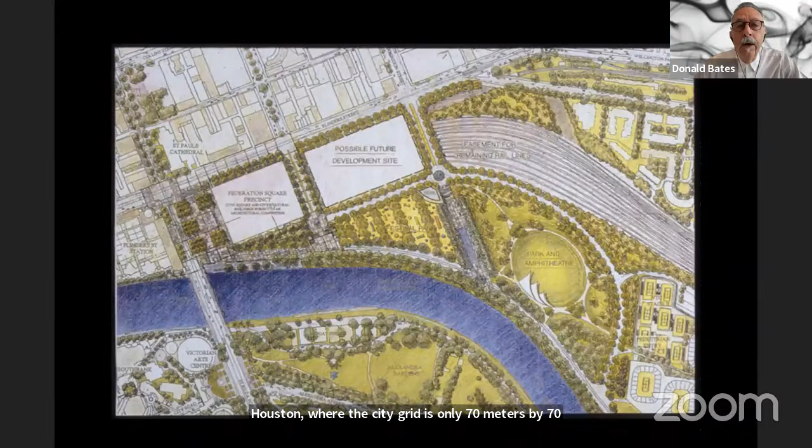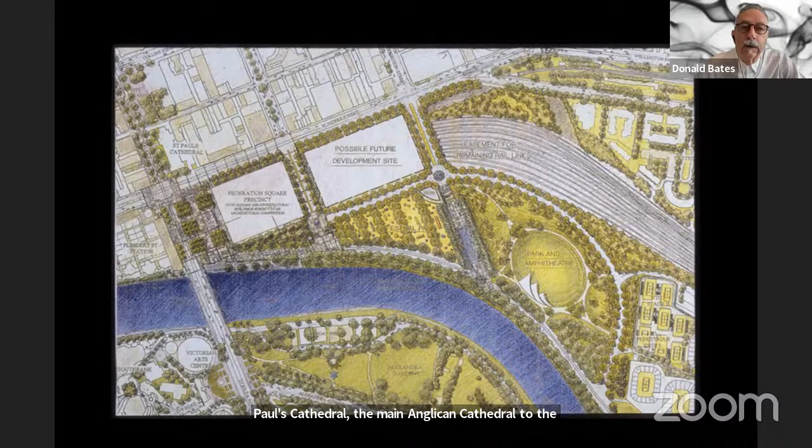These are some of the documents from the competition. On the left-hand side is the area they called the Federation Square Precinct. It also shows a public plaza to the front, facing across to the main railway station, with St. Paul's Cathedral, the main Anglican cathedral, to the north. The sense was of continuing the Cartesian grid of the CBD down until it reaches the riverside.

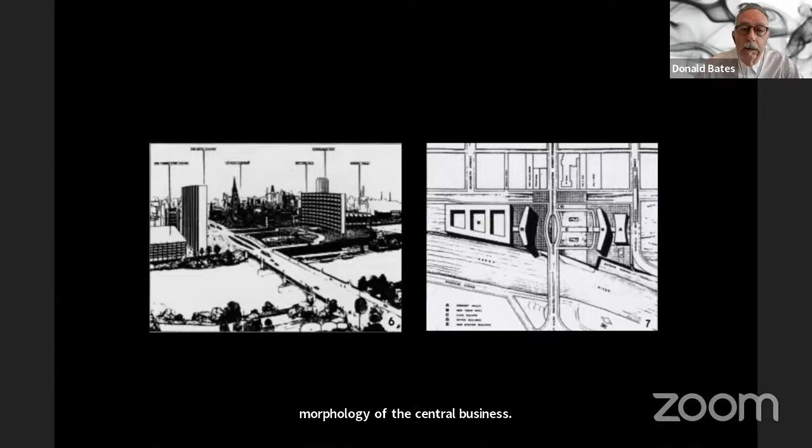This photograph from that period shows the site just north of the river, and the gridded morphology of the central business district. There had been other projects proposed for what is now Federation Square, but they never came to fruition. The competition was really to build over the railways.

It was called Federation Square because it was to celebrate 100 years since the founding of the Federation of Australia in 1901, so the idea was for the project to be completed by 2001—though it actually took a year longer. The point of showing this image is the yellow framing of the CBD and the order of the grid. But our site is outside the grid.

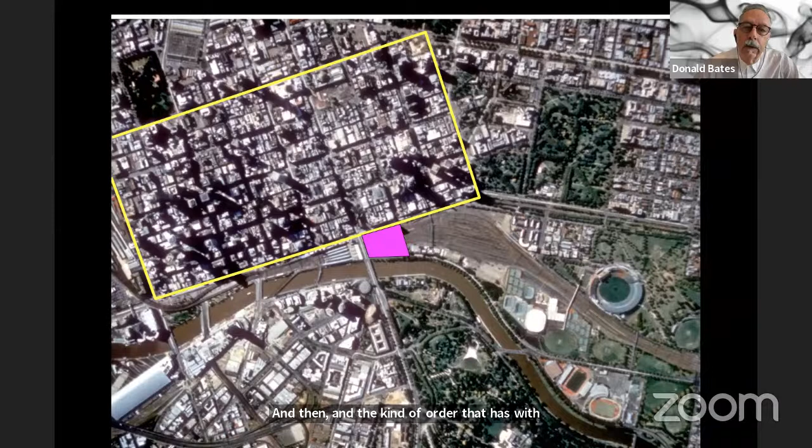It was important to realize that, because it meant we didn't have to follow that Cartesian order. Not only is the site outside the grid, but it's also related to the railways running through, which have their own logic and formal arrangement, as well as the river—being an alluvial river, it had historically shifted and changed. For us, this was a zone of flux, different from the CBD.

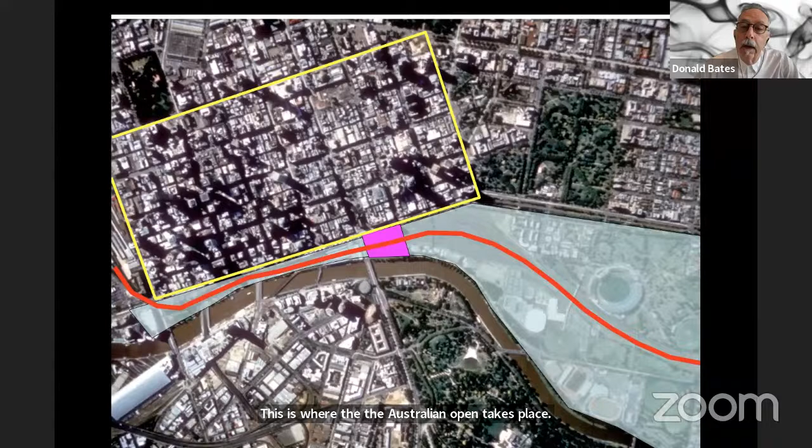Also, on the right-hand side, there's a whole series of sports facilities—this is where the Australian Open takes place, and there's a large football stadium for Australian rules football and cricket that holds 100,000 people. But it seemed to us that we could operate in a very different way than that.

But my digital tool and the tools that we used were things like Illustrator. They weren't drawing programs or architectural drawing programs.

And then with some of the functions, some of the filters in Illustrator, we started to change it. So this is a kind of outcome of taking that tartan grid and manipulating it and distorting it, so to speak. And then out of that, a series of hand drawings, taking from those distortions, those twists, those shifts, to try to come up with a sense of order that was different from the CBD grid.

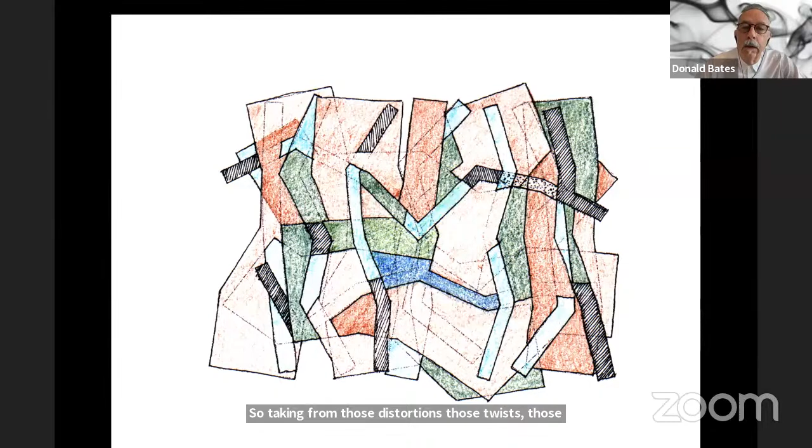We did other kinds of drawings, like here with folded tracing paper. We were just trying to understand what happens when these filaments, these lines, these sort of bands of paper overlap, and you get increased senses of densities, and that those densities produce a kind of visual differentiation of how a space might be organized. These are just lots of images of drawings that we worked on, working back and forth to see these filaments and how they might exist.

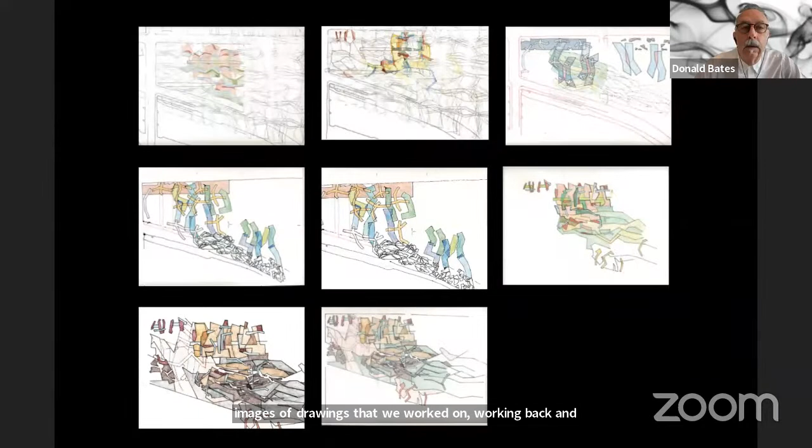These are from the office again, both Peter and myself drawing these, but also everybody else in the office was working through these projects like this.

We were interested in the way in which in architecture, the line is really the thing that makes difference, that when you draw a line, you're notating differences. You're notating the difference between stone and glass, the difference between inside and outside, the difference between this is mine and that's yours, the difference between one kind of experience and another.

And so we were also trying to do drawings that weren't just about lines where there was an overlap or a fading or a transition between one tone or one tonality and another, or color and so on and so forth. So these are the kind of works that we were trying to look at and the kind of spatialization of what that might mean.

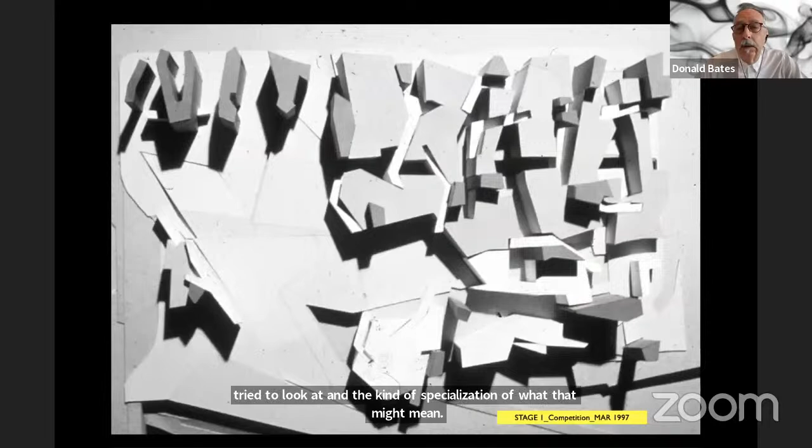It was a two-stage competition. This was a model from the first stage. We were fortunate to get shortlisted with 4 other practices. And then from that, we developed it further.

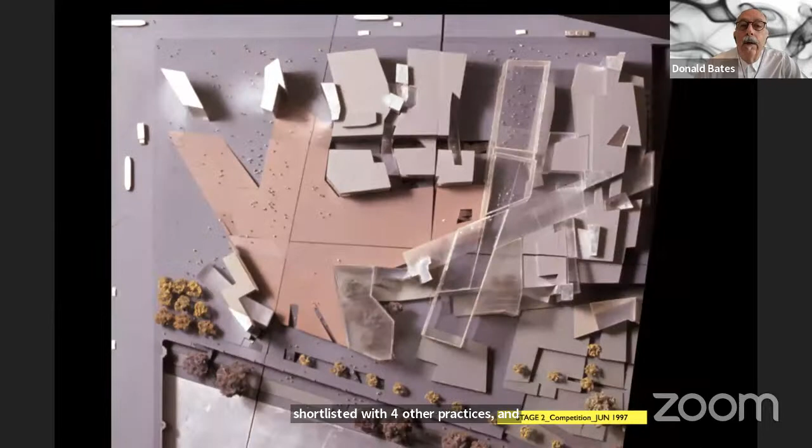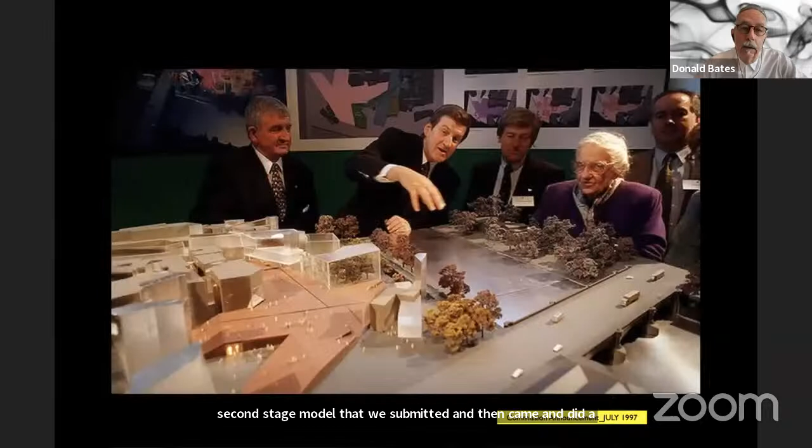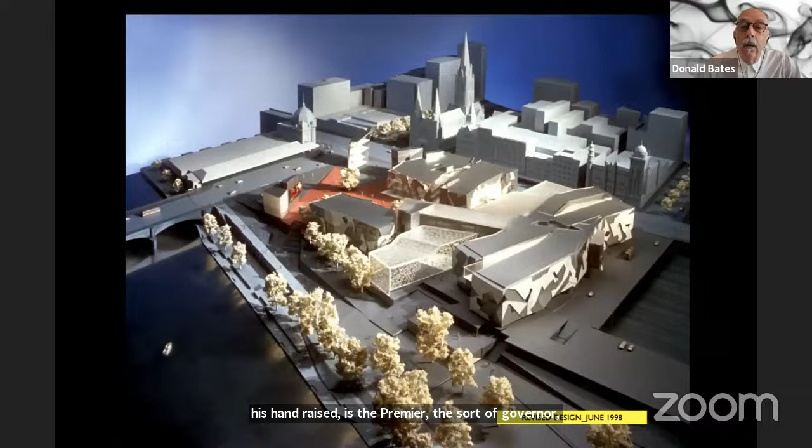This ended up being our second stage model that we submitted and then came and did a presentation to the jury. And then over time, and this was after the announcement, the man in the middle with his hand raised was the premier, the sort of governor, you might say, of the state of Victoria. And then this was the model after we had won, and some other additions had been noticed.

So between the competition and the actual project, a big section, which is the building closest to the right-hand side, which is the National Gallery of Victoria, Australian Art, was added and it hadn't been part of the competition. I'm just showing this as a kind of background to the project as a whole, because what I really want to talk about are the facades and the atrium structure.

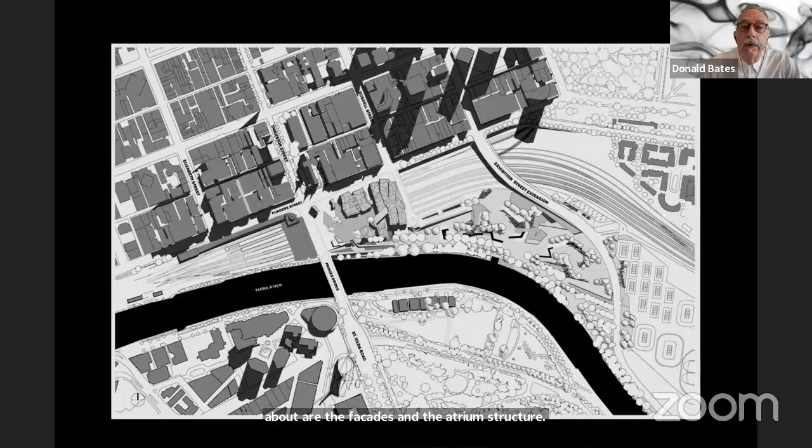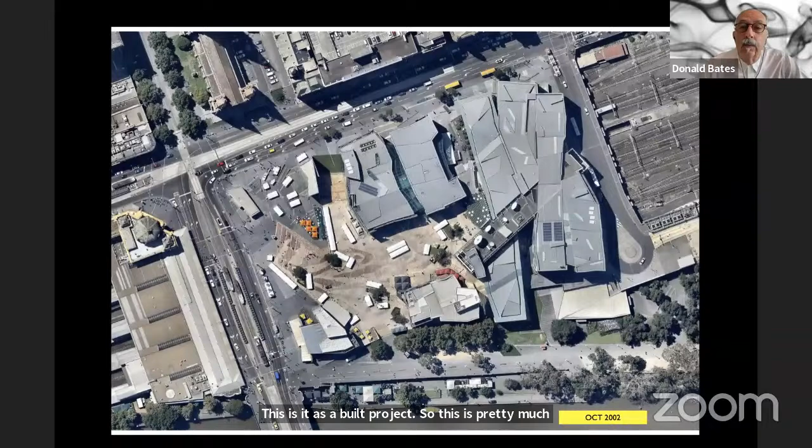But this is it as a kind of completed project in the context of the city. This is it as a built project. So this is pretty much what it was in 2002 when the project was finished. You can see it within the context of the city, and within the riverside and the train station to the east, to the west of the project.

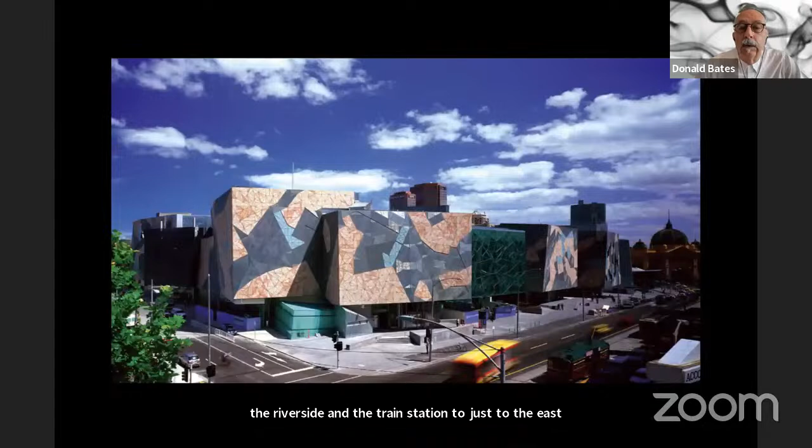The plaza is a kind of double ground. That is to say, it starts at ground level, but by the time you're at the far end of the plaza, you're actually one level above the street. And there's an entry point from Flinders Street, which is the street to the north, that comes in. So it's a kind of double ground.

I wanted to really focus on this theme of coherence and difference, partly because it's a response to the project - the project is a precinct as a whole, Federation Square. So it's not just the public square, it's a precinct with cultural buildings, an art gallery, multimedia and screen-based exhibition space, and a museum. It has a performance venue, offices for radio and television, and other venues and spaces for food and beverage and commercial facilities like bookshops and so on.

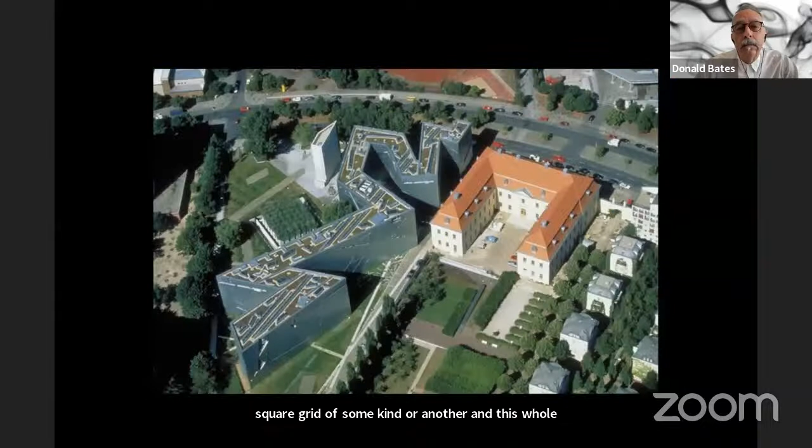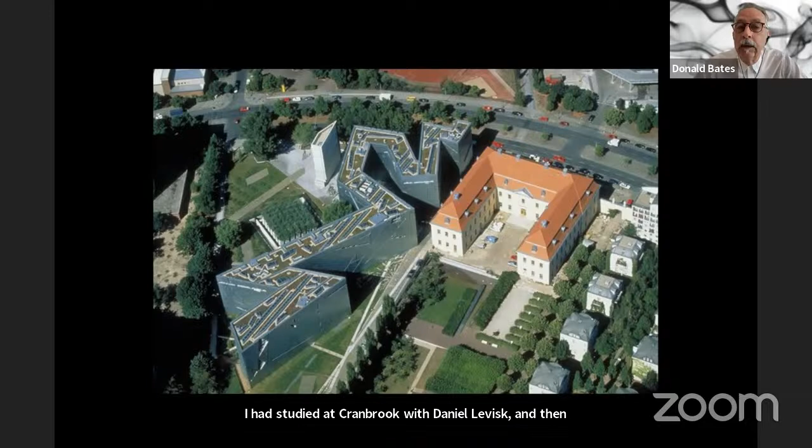I had studied at Cranbrook with Daniel Libeskind, then worked with him as an associate when he was doing the competition for what was then the Berlin Museum, now called the Jewish Museum in Berlin. One aspect that stayed with me was this sense of: what is a facade? What does a facade do? What kind of articulation can it have? Does it need that ordered grid which seems about utility, ease of construction, regularity and repetition, versus the kind of unique articulation of a surface like you see in the Jewish Museum in Berlin?

And then the consequence of that - what does it mean for an interior when you don't have an ordered gridded structure on the outside or on the facade, and what does that mean for the interior?

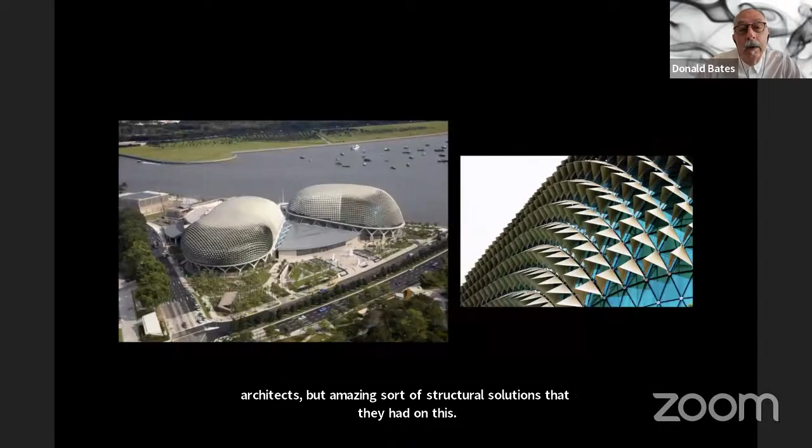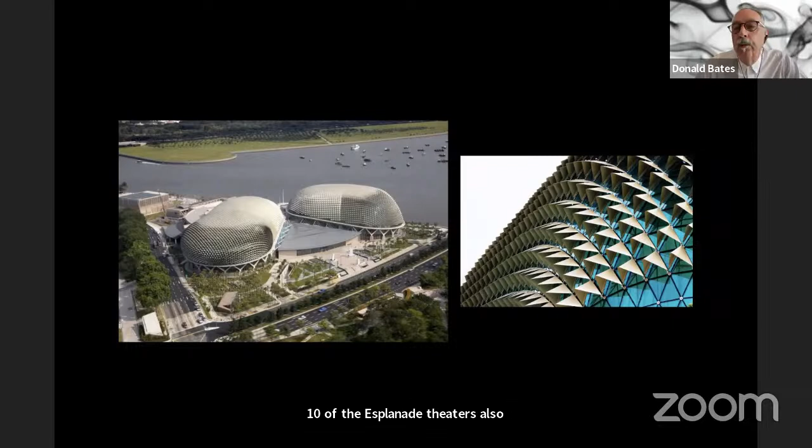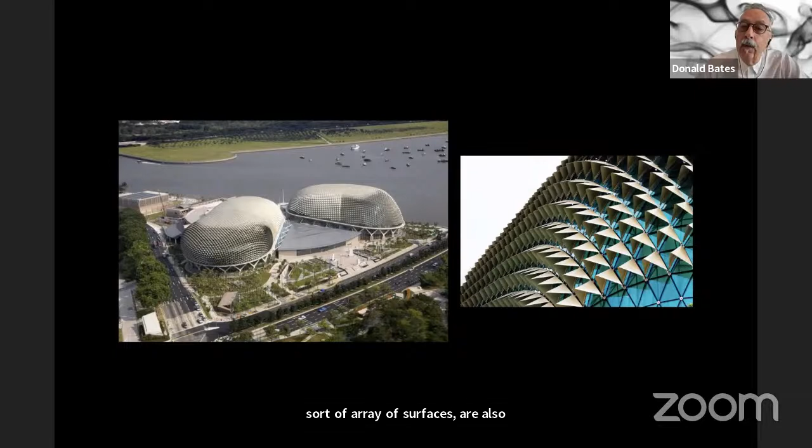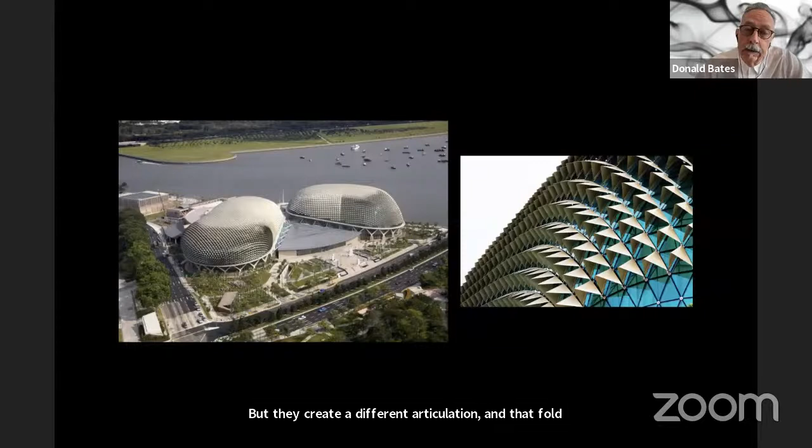They also did this project again with Atelier 10, the Esplanade Theaters, also in Singapore. You can see a detail on the right-hand side. This structure has a very unique array of surfaces that are also shading devices. They're quite simply a folded plate, but they create different articulation, and that fold can be compressed for a different angularity as a sun shading device, giving you this patterning that comes of it.

So these are the guys we were working with from day one. As we were developing the project, we would take a drawing like this, walk across the street and say, okay, we're thinking about this for a facade—what do you think? And they'd say, well, what is it? What is the black, an opening, or is the black solid? Is the white some kind of pattern? What is the grid and stuff?

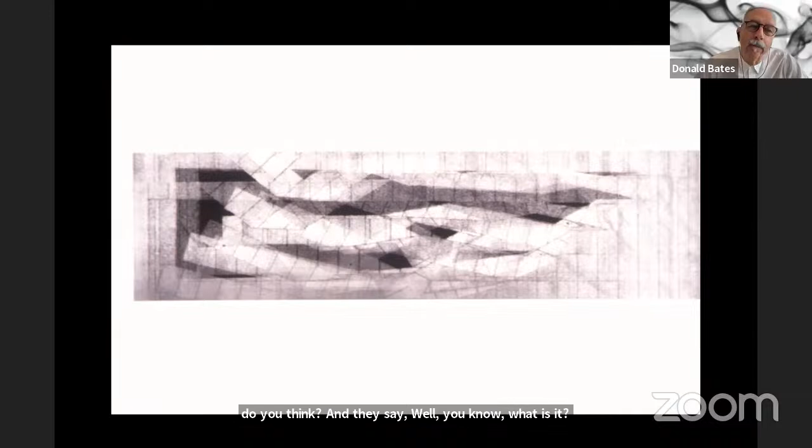So we were interested in the architectural possibility of transitioning from one material to another, one figuration to another, one way in which a surface can be articulated where that transition is almost indecipherable.

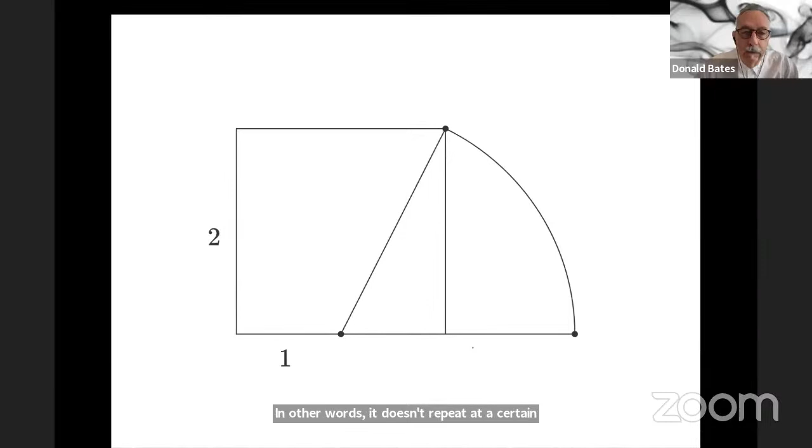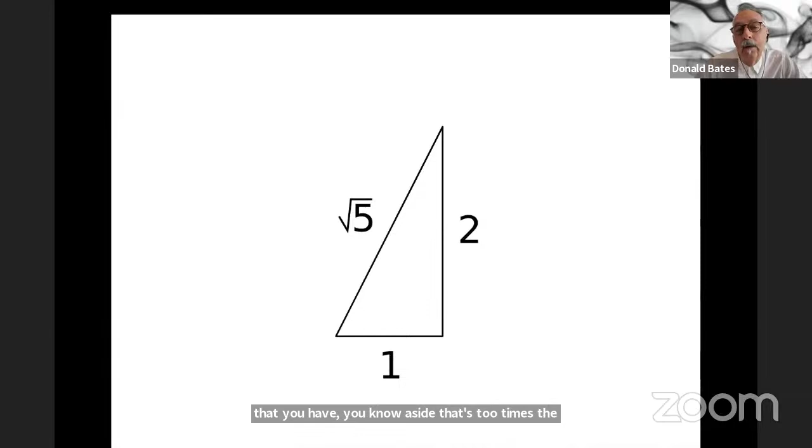In other words, it doesn't repeat at a certain point. It comes out of a simple figure of the golden ratio, so that one side is 2 times the length of another, and the third side is root 5. Within this, you start with a triangle and you can subdivide it, and then again—one triangle plus 4 other triangles keeps generating a similar congruent set of triangles that are endlessly morphing and moving through. This is why we called it a fractal facade.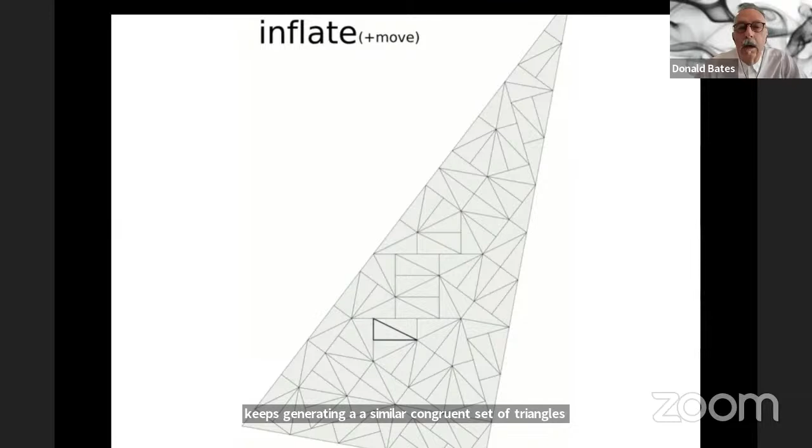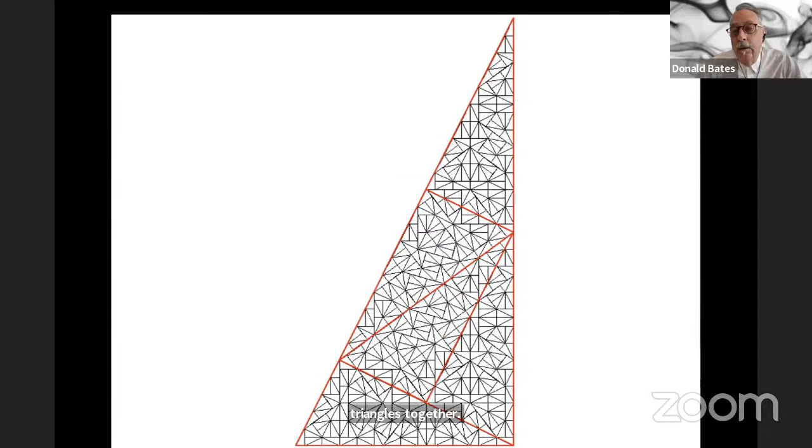So you start with a single triangle, put 4 other triangles together, and you get a self-similar triangle, and so forth. You can either make it additive or do it by subdivision. We start with a surface that has this sort of patination. But what it also meant, from a fabrication point of view, was that it allowed us, in the same surface, to articulate different figurations, because it's just a way of selecting how many of these triangles form a group. Within that same surface, that same pattern, you can have lots of different groupings and therefore different figurations.

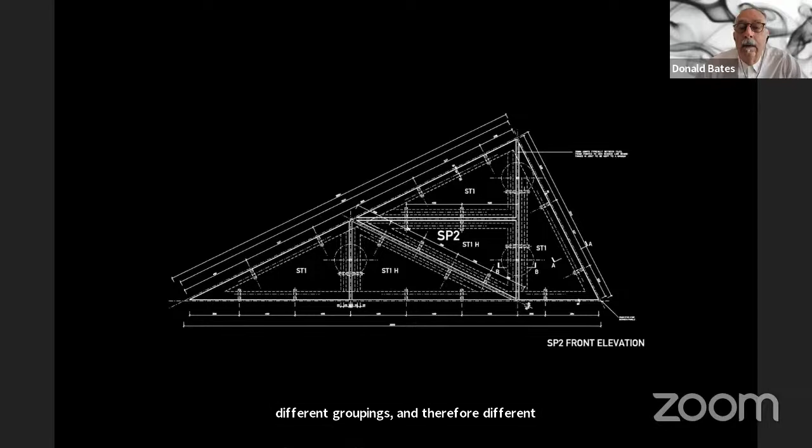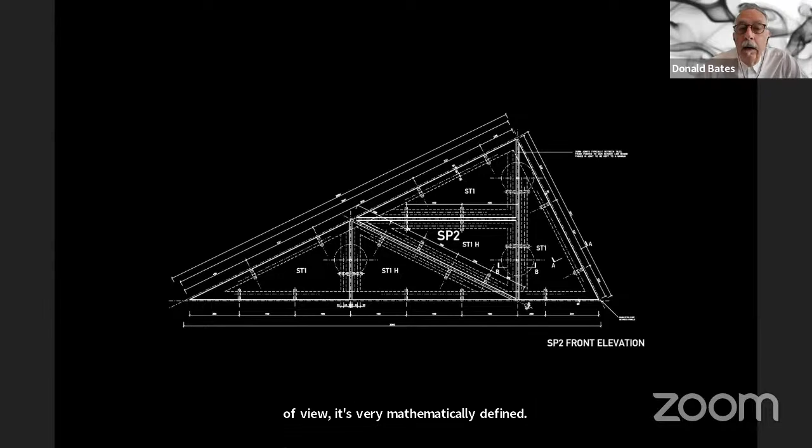So from a structural point of view or a fabrication point of view, it's very mathematically defined. Taking one triangle and adding it with 4 other triangles of the same material, they're all put together on an aluminum frame, so they're all attached.

You can see in this working drawing, this is actually showing one with a piece of stone where you can see the attachments to an underlying aluminum frame.

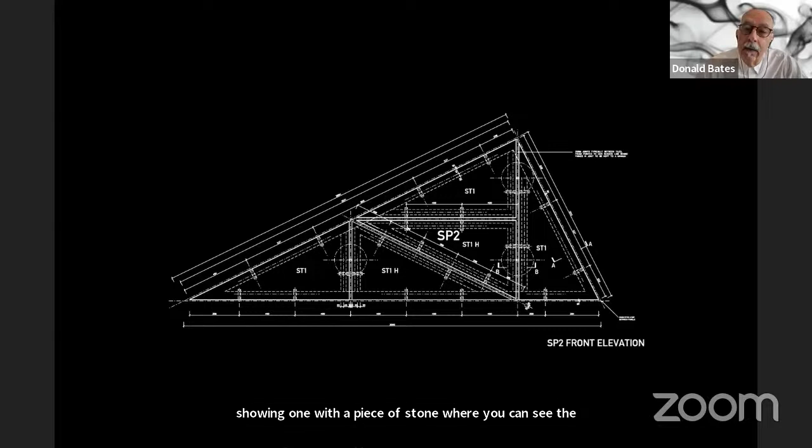When we have a single panel, a single triangle that you would see, we call that a tile. And when you put 5 tiles together, you get a panel. And you would put 5 panels together, you get a mega panel. And these 5 panels, which have an aluminum frame, are attached then to a steel frame.

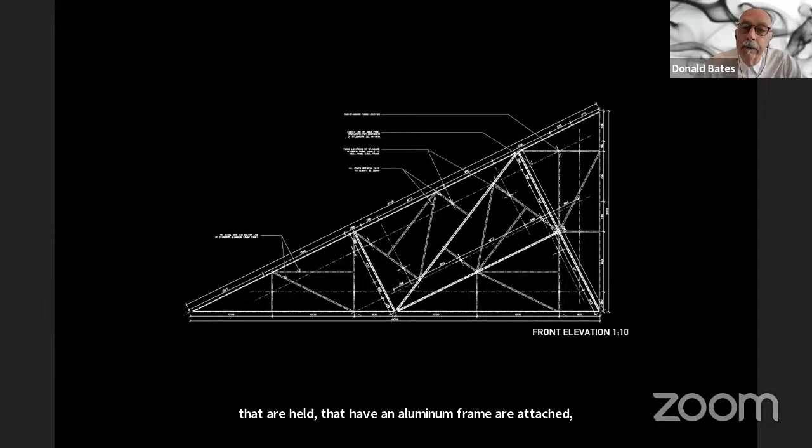And all of this is done in the factory, so all of this is prefabricated in the factory. So even though we're trying to create a facade with a great degree of variation and differences, we can still allow it to be prefabricated because of its geometric order.

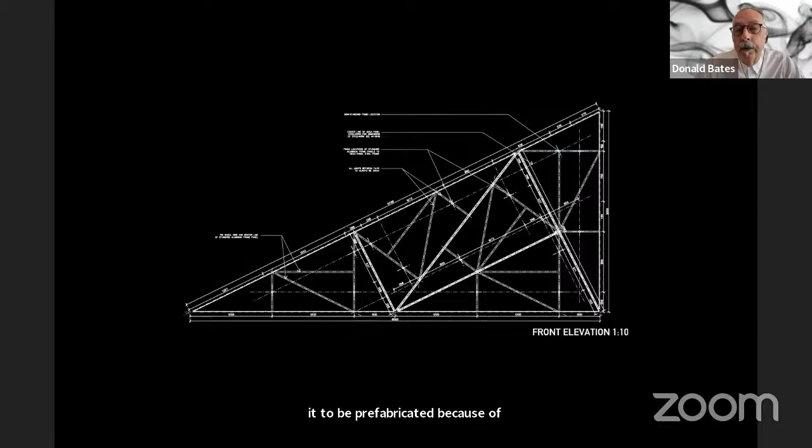So these are some of the steel frames that the panels would go onto, the steel frames for the mega panels. And this is one of those mega panels.

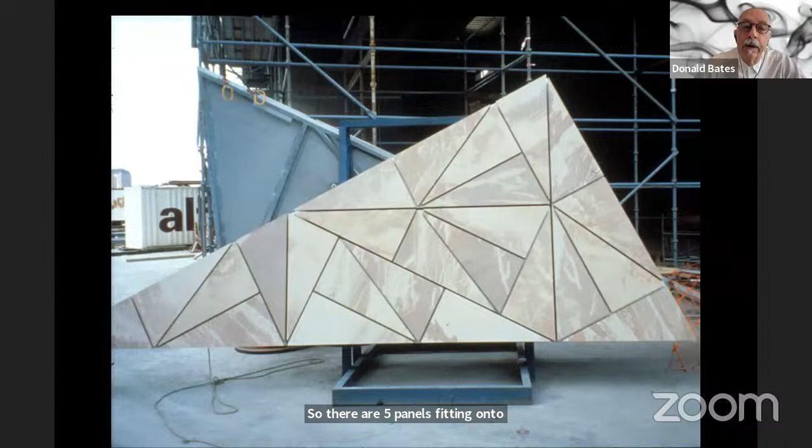So this is the panel that's been brought from the factory and is waiting to be put up on the facade. It just so happens on this panel, all of the tiles, that is to say all of the singular triangles, are made out of sandstone. There are 5 panels fitting onto this mega panel, and each panel is made up of 5 triangles, and they just happen to be sandstone in this instance.

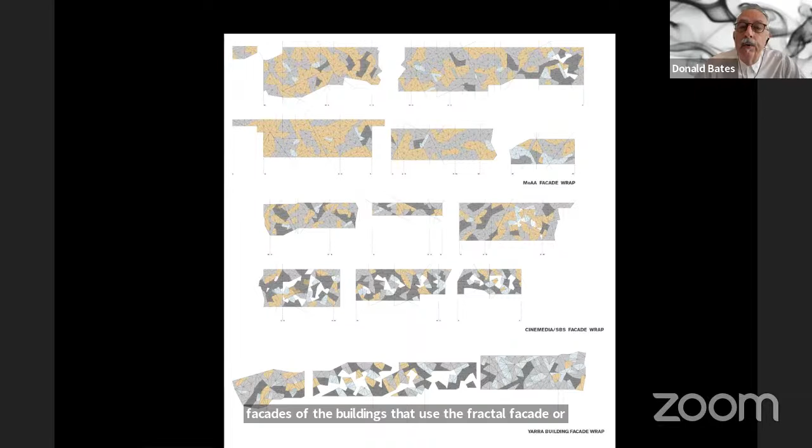This drawing shows all of the facades of the buildings that use the fractal facade, or the pinwheel grid. You can see there's also a differentiation. The top 2 bands are the panels and facades for the museum, for the National Gallery of Victoria, Australia, and they were basically composed by Peter, my colleague.

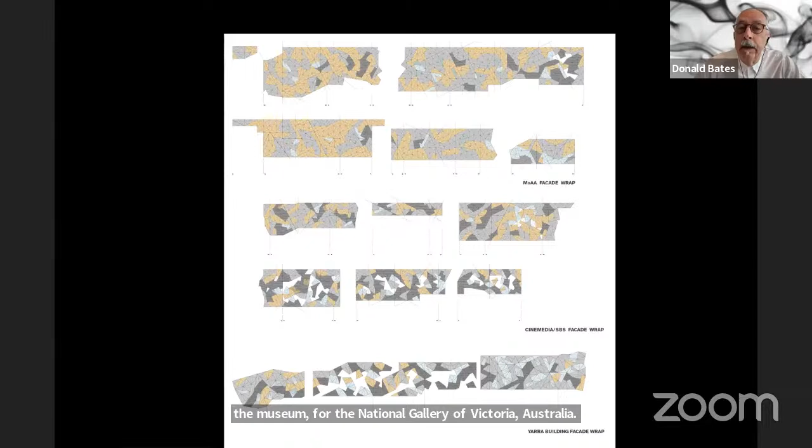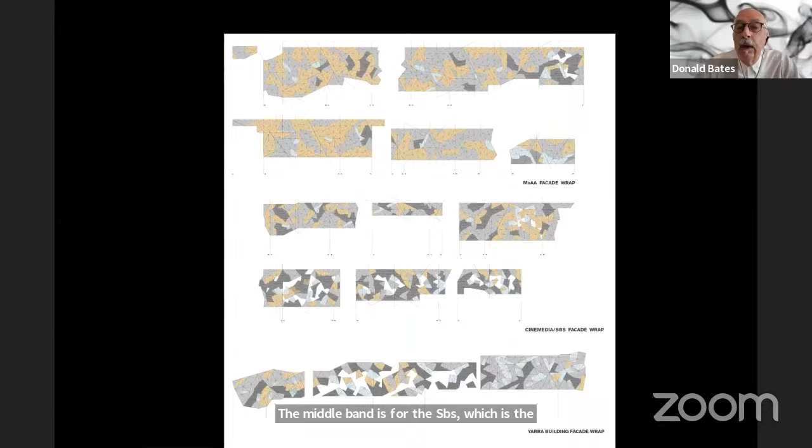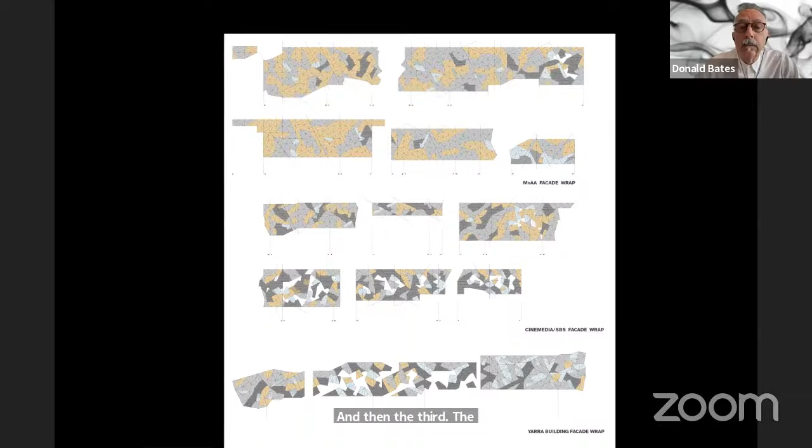The middle band is for the SBS, the broadcasting service, and what's now called the ACMI, the Australian Centre for the Moving Image. I was in charge of those, so that patination is ours. And then the third, the last row at the very bottom, which is on what's called the Yarra building, was done between Peter and myself and a group of others in the office.

This is the building. You can see it's still under construction in this photograph, but you can see it in some kind of comparison to the buildings in the background of the CBD.

And so all of that surface and that surface differentiation. We have zinc, we have perforated zinc, we have the sandstone, and there are some glass, which are also in the triangular grid pattern.

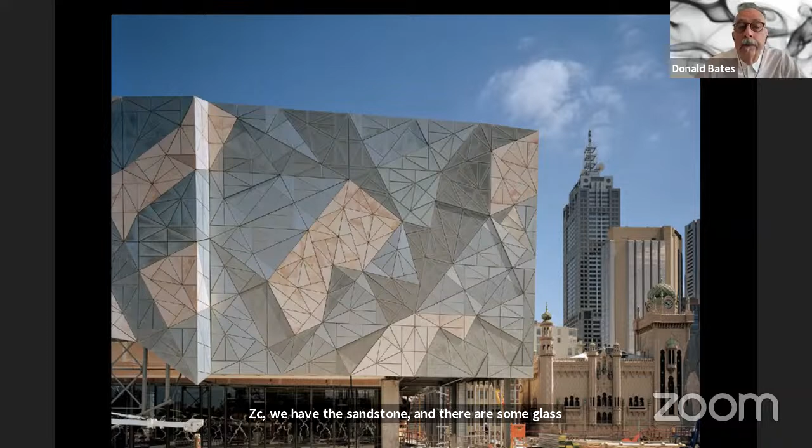This shows it coming together, and particularly on the building for SBS, the Special Broadcasting Service, because it's actually an office building, people are in there working, they need to be able to see out. So the facade here in perforated zinc, this is from inside the offices looking through the facade.

On this image, we're actually facing to the north, which is where the sun is in the Southern Hemisphere. And so it's really acting as a shading device from the sun.

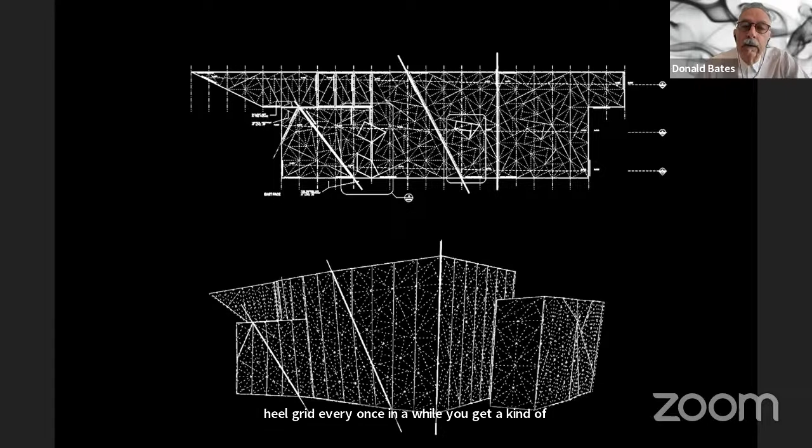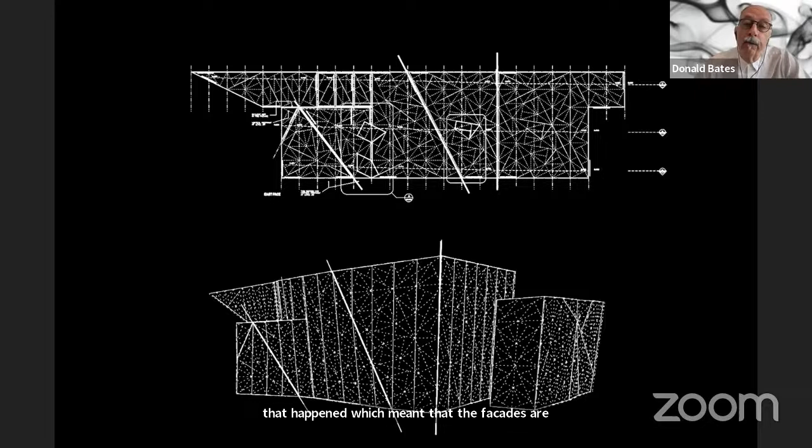The other thing that happens is that within that geometry of the pinwheel grid, every once in a while you get a kind of alignment of the geometries. And where those triangles align, you get a kind of folding point, a fold that happened, which meant that the facades are not extrusions from the ground up or from one plane upwards. They actually bend and fold and articulate.

So you can see here, this is on the National Gallery of Victoria. There's a fold that takes place in the facade because there's a staircase behind that runs from the upper level of the galleries down to the ground.

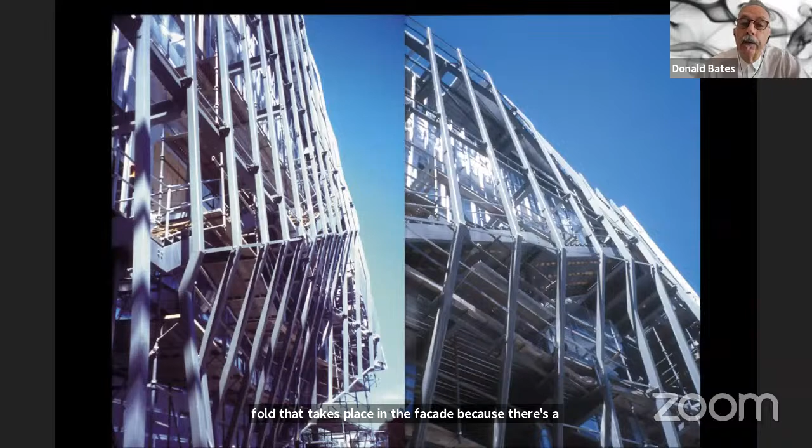And so once we've covered that staircase, then the facade can fold back in, so that you get this as a result of where that's articulated.

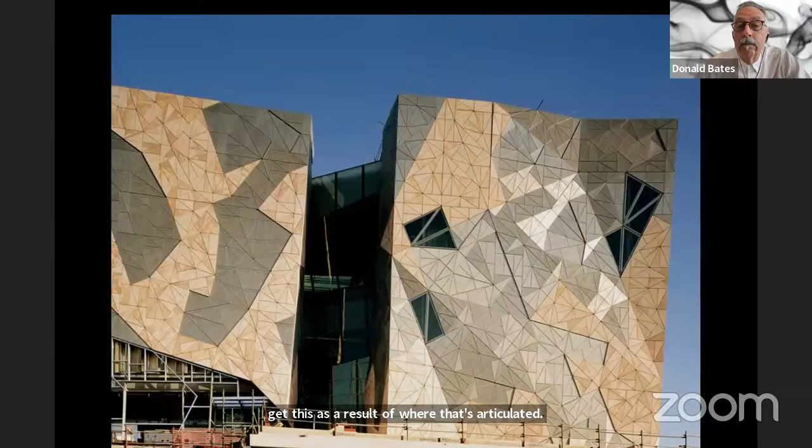This is on the backside, again, of the National Gallery of Victoria, and you can see with the shadows and such, you can see how that surface is not flat, it's articulating in and out.

And again, there's also even the slight difference between the thickness of the stone. The stone is about 2.5 inches thick, let's say. And then sometimes the zinc, which is just a millimeter or so thick on a frame, is flush to the top surface, and sometimes it's flush to the lower surface of the sandstone. So you also get a secondary patination of shadow lines between the difference of 2.5 to 3 inches.

And as I said, sometimes we have offices. So within the same system, with perforations and even leaving panels off of the building, we have the possibility of views to the outside.

These other images I showed just before are for the National Gallery. These are galleries for art, so we don't have natural daylight going into those spaces. The same thing happens for the cinema, but then we also have offices. So the same system again allows for a sense of coherence while also allowing for difference.

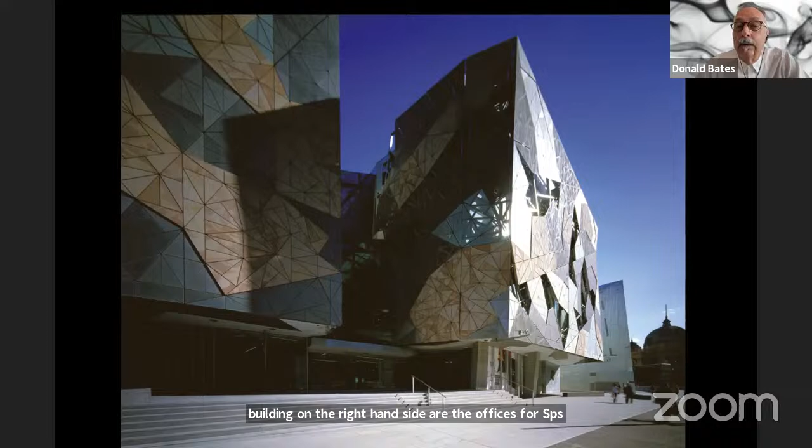You can see in this one on the left-hand side, this is the building that has the cinemas, and the building on the right-hand side are the offices for SBS, the broadcasting service. This is the facade we were looking through, facing towards the north.

This is the National Gallery facade, and you can see it above the railways there, and how it changes from the left-hand side to the right-hand side. On the left we have a lot more zinc and less sandstone, and on the right we have more sandstone and a little bit less zinc.

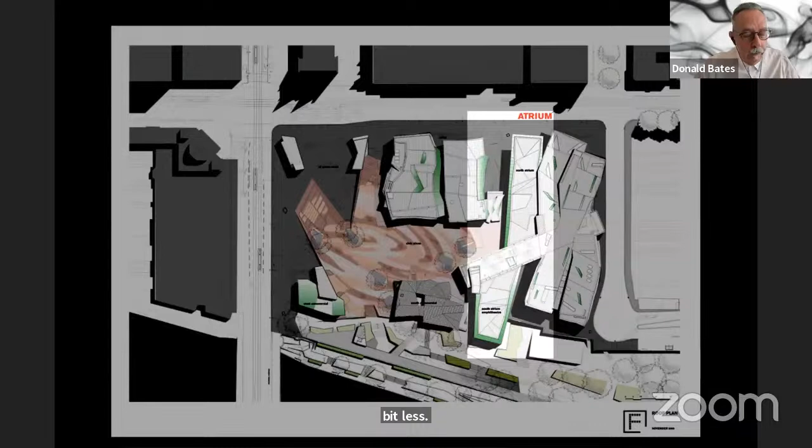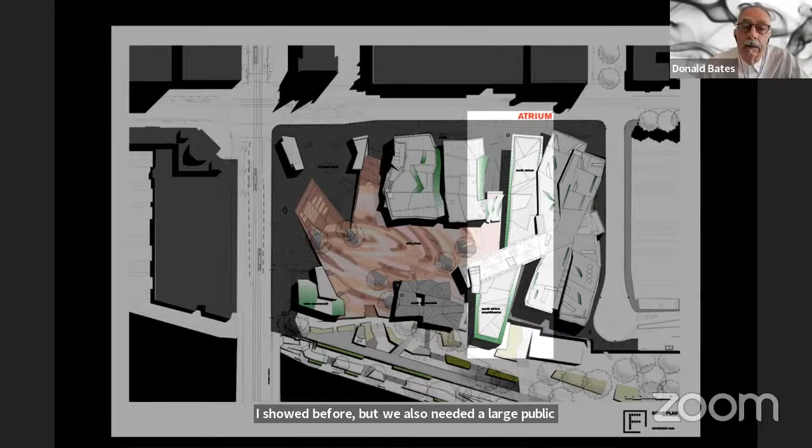Coming out of that facade is also a major structure called the atrium, which is a large open space. The plaza is where lots of public events happen, as I showed before, but we also needed a large public space that could be covered, because in wintertime in Melbourne it's quite rainy and cold, though it doesn't snow. There are lots of public events that happen in Melbourne, so the atrium was that space that would allow for public gatherings, but with some protection.

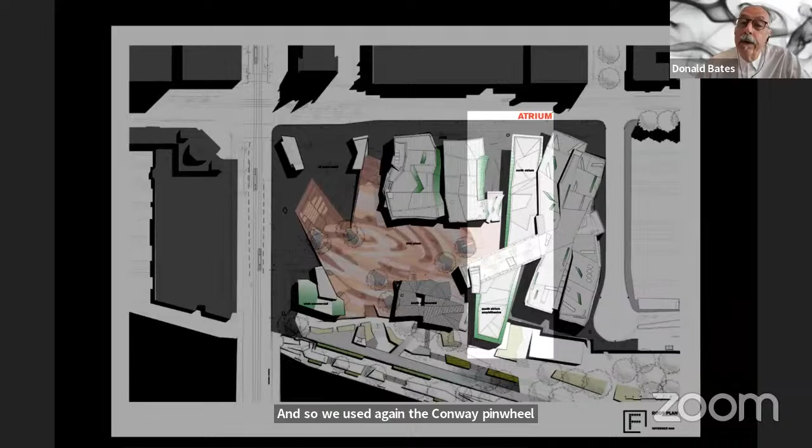So we used, again, the Conway pinwheel grid, but now as a three-dimensional structure. And we ended up with this kind of thing. This is the entrance, again, from the north.

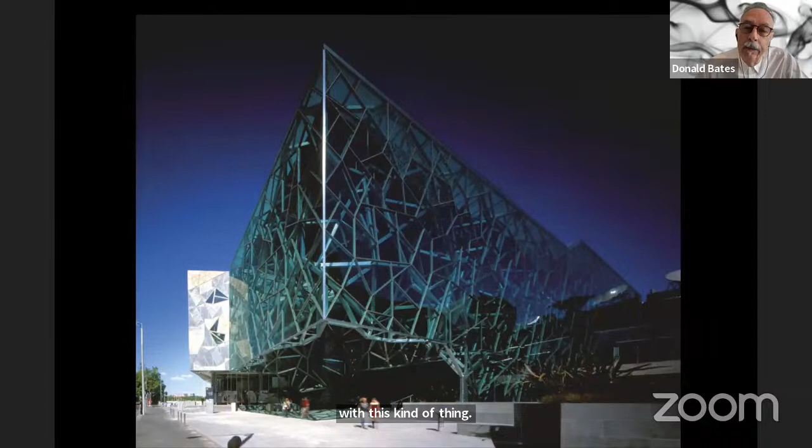The other important thing was that there was no front door — that is to say, it couldn't be closed. So this public space, which is a connection from the city, from the CBD to the north, all the way down to the river, is open 24 hours a day, every day of the year. There is no way to close it off, and that produced some issues in terms of ventilation and such.

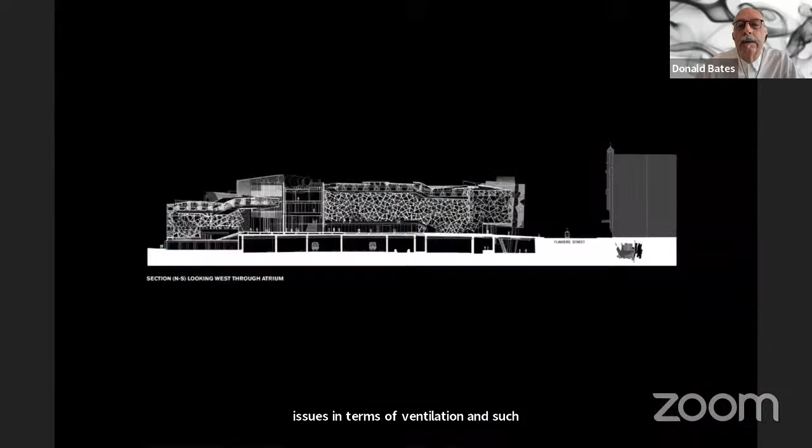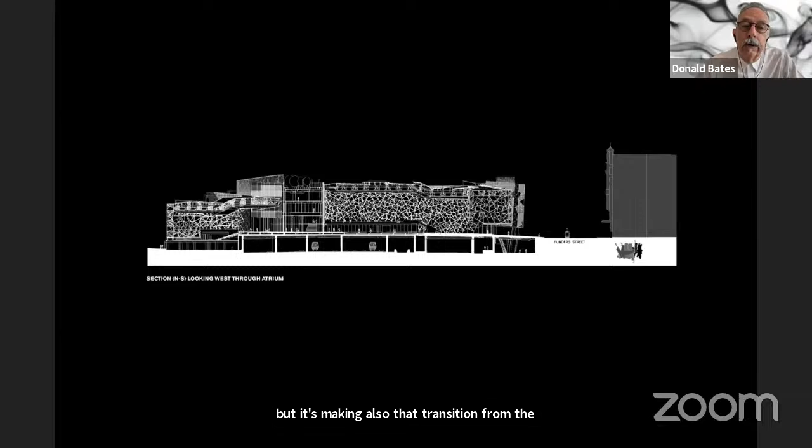But really, just to talk about the structure itself: you can see on the right-hand side is the CBD, the downtown of Melbourne, and on the left-hand side, just a little bit beyond the drawing, would be the river. So it's over the railways, but it's also making that transition from the city to the river or vice versa, and it starts to step down once we're no longer above the railways.

This structure is about 110 meters long, so that's about 350 feet. And it's about 18 meters across and 17 meters high in terms of internal volume.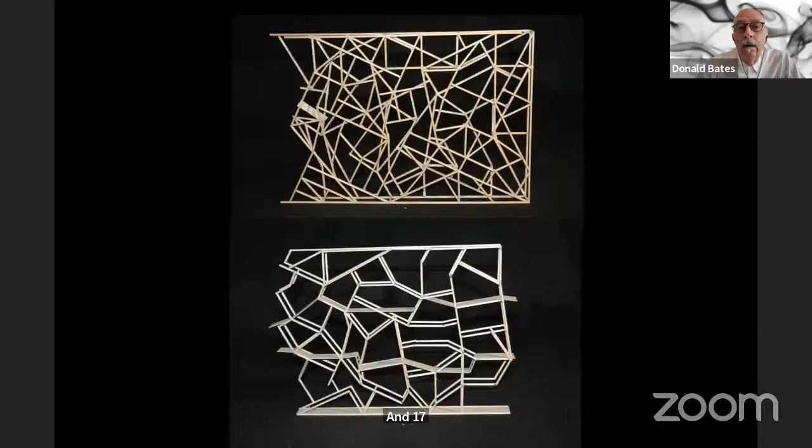So we started off with the Conway grid, the triangular grid, and then we started to manipulate it. Working with Atelier One particularly, we realized that the Conway grid, fully articulated as that triangular grid, effectively produces a kind of three-dimensional space frame. But as with any space frame, not all the elements are doing the same job, even though they're all the same size or dimension. So we started looking at what it would mean to start taking bits and pieces out.

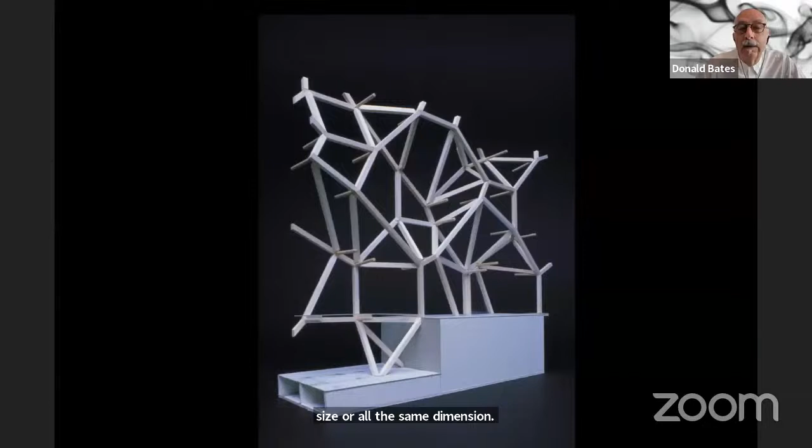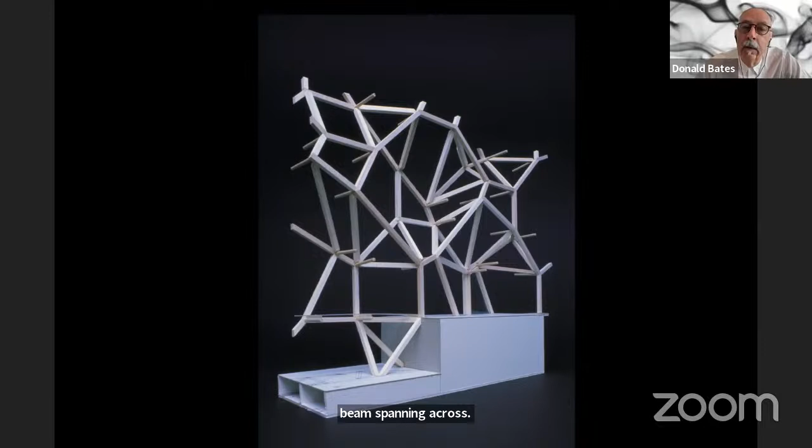You can see in this model that there's a kind of surface — the space frame itself forms a portal frame, with a depth of about 1.5 to 2 meters, and within that it provides its stability. So we don't have things like central columns and beams spanning across; it's acting as both a space frame and a portal frame. But you can see there are places where it just gets dropped out, because the forces move from the external surface towards the inside surface in terms of where the loads are being carried.

This is the makeup of it. In the middle we have, like in the model you just saw, that kind of space frame. Then we have two surfaces of glass — glass on the outside and glass on the inside — and all of that glass is laid out in the triangular pattern.

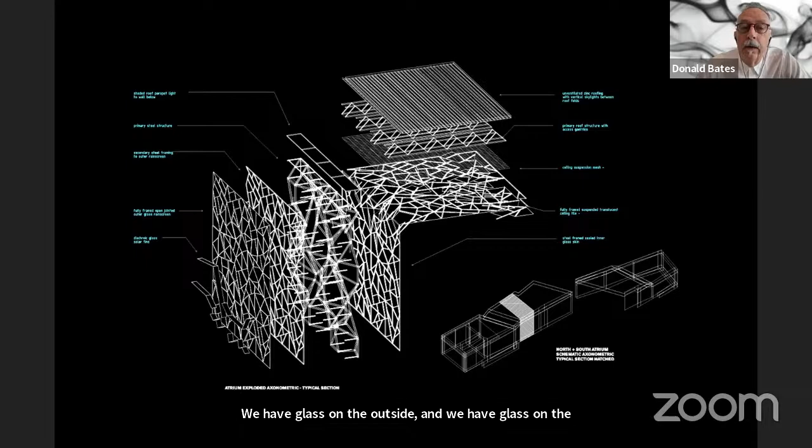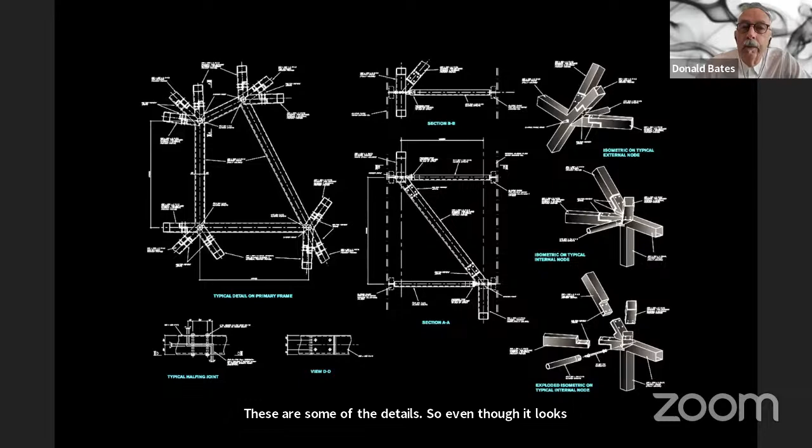These are some of the component parts that you see, and some of the details. So even though it looks quite chaotic to a certain degree, there are actually these joints, which became the critical piece — there's only something like 9 different joints. And then you have the pieces that connect, and out of that there are only something like 6 or 7 different links that join together.

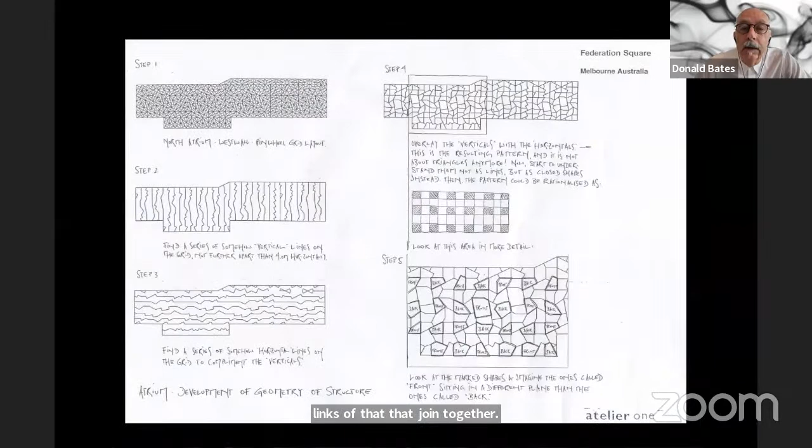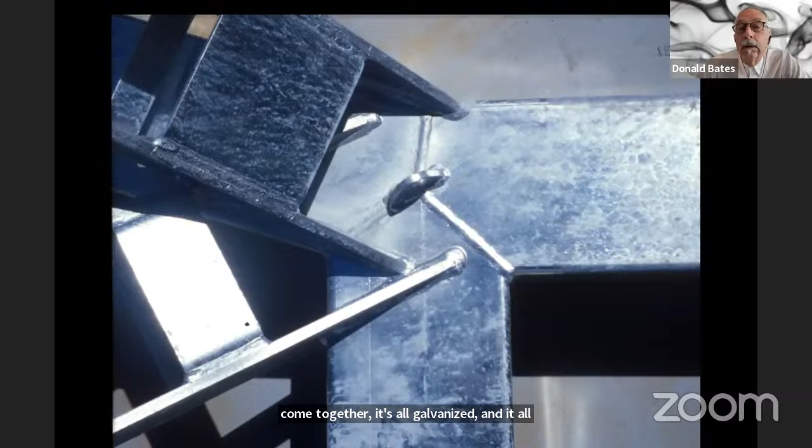But it is in those joints that the complexity exists. These are just some of the sketches of trying to work through what piece is doing what. It's really in the connections, because we're making welds that are not just horizontal, which are already complex because of the angles, but then when it joins together three-dimensionally, that becomes quite complicated in terms of how these pieces come together. It's all galvanized, and it all had to fit together within a tolerance of about 4 millimeters. Some of the grids that are working through.

So I'll just go to this image, it probably helps. What we end up with is a kind of almost like a trellis system, where you have the structural grid, the structural frame, and then layers of glass on the inside and layers of glass on the outside. So you get multiple layers of material, the structural grid as well as the framing for the glass. And even though it looks quite chaotic, there are only 5 different shapes of glass. But because it's part of a triangular grid, these shapes, which might be 5-sided, 4-sided, or 6-sided, rotate, and therefore it looks more complex than it actually is.

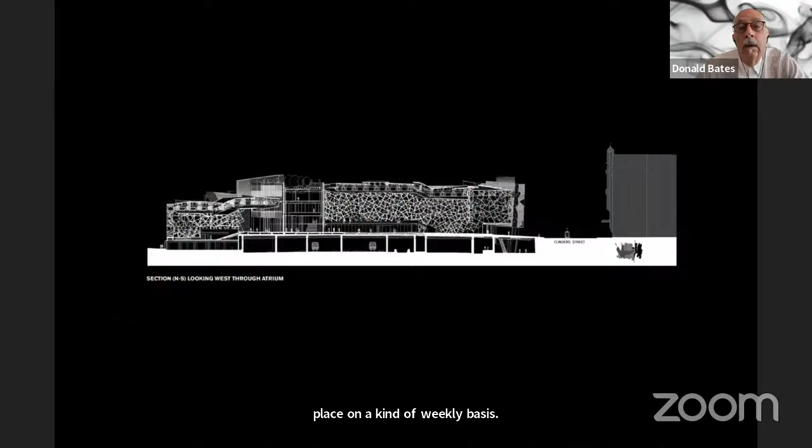So these are the kind of events that take place within that structure. It goes from the city, which is to the north, and acts as a kind of covered walking space, a transition from the city down to the river, but is also an event space where lots of different activities take place on a weekly basis, some that repeat, some that are once-off. As it makes that transition down towards the riverside, we ended up with this space, which was just trying to literally make the transition down to the level of the river. But we couldn't start it until right where the seating is, because before that we have to have clearance above the railways. Then once we can start to cascade down, it turns into an event performance space.

Originally, when we were looking at this, it was just going to be a place where maybe there'd be a few events and stuff. But our acoustics engineers looked at this grid and said, well, if we started allowing some of the glass to actually fold into the portal frame dimension, that thickness, and we could even leave some, we could acoustically tune the space. So they started working on it, and we were able to turn this into a music venue, so we can have chamber orchestra music in here. It's both a public space for lots of public events, but also for music events.

And because it's coming directly in from the street, it means it's a very democratic space. That is to say, you come in from the street and you walk through, and suddenly you're part of a conversation about sustainability, about race relationships, about the voice for the Aboriginal people of Australia.

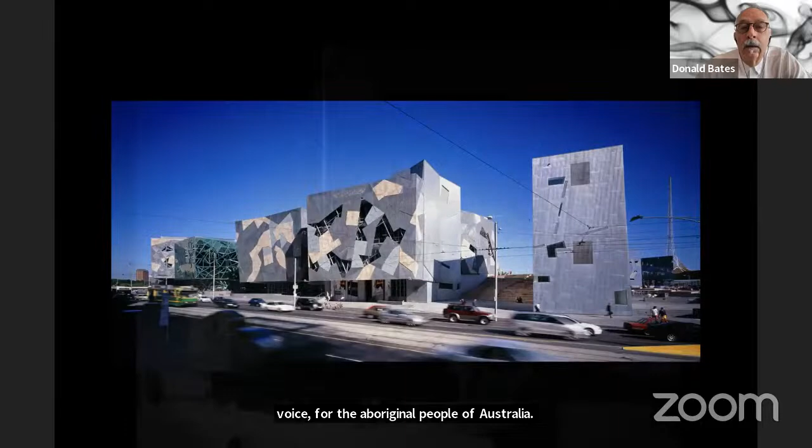My name is Kashmir Shah, and I'd like to thank you for an insightful and engaging presentation. The Federation Square project elicits association between the role of civic architecture to patterns of urban space and the relationship between discrete institutional buildings and the city. It has been published, and you have presented how this project recapitulates the urban order of the 19th century fabric of Melbourne's narrow laneways, blocks, and streets. You published a sketch diagram of figure and field relationships, which you have just shown this evening, suggesting the subversion of the legibility of building figures and also hinting at narrow routes into and through the field. While in London, in the early design stages of the project, how was this diagram instrumental in the design of the massing figures and public routing of the urban pattern of Federation Square?

Well, to be honest, we did lots and lots of diagrams. We were interested in looking at the work of Stan Allen, who wrote a book that talked about field order, or orders that are not based on classical geometries, axial planning, or centrifugal plans. So we were interested in that work.